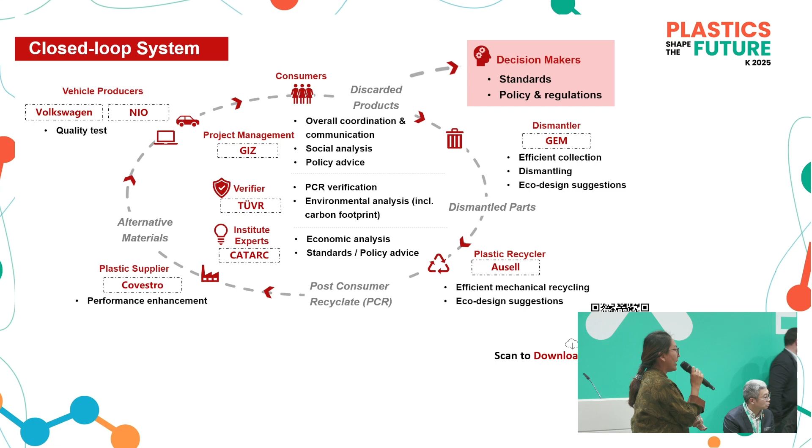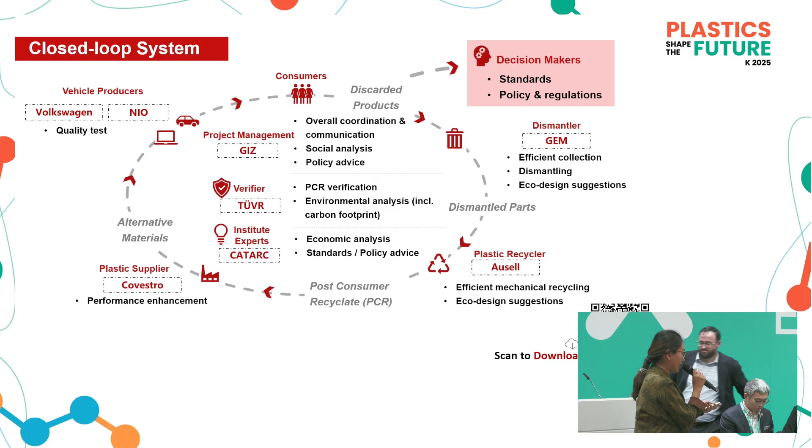In the past, I think, 30 months, we are happy to share some results today. Beyond this, you can also scan the QR code, because we are also doing a baseline study in China about plastic circularity in the automobile sector. And as our partner from Green Eco Manufacturer cannot come today, I will speak on behalf of them.

So this is the journey of the dismantling process from GEM. It normally takes only 10 minutes to do all the pre-treatment, dismantling, everything. In the project they are removing the car light from the car, but without further approaches, because we have to do an internal experiment. This is challenge number one. If they removed the shell from the car light, it would take an extremely long time, and they would have to invest a lot of personnel and generate additional cost.

And challenge number two: after the analysis, we found out that of the material selling part, 90% comes from the metal, and for plastic they can earn only 4%. So they quite lack the motivation to dismantle and refine the plastic further. This generates the challenge that we have to pay additional logistics cost, because we have to send the car light in that format to Ausell. But we are also happy to hear what Ausell is doing, and I will pass to our corner here.

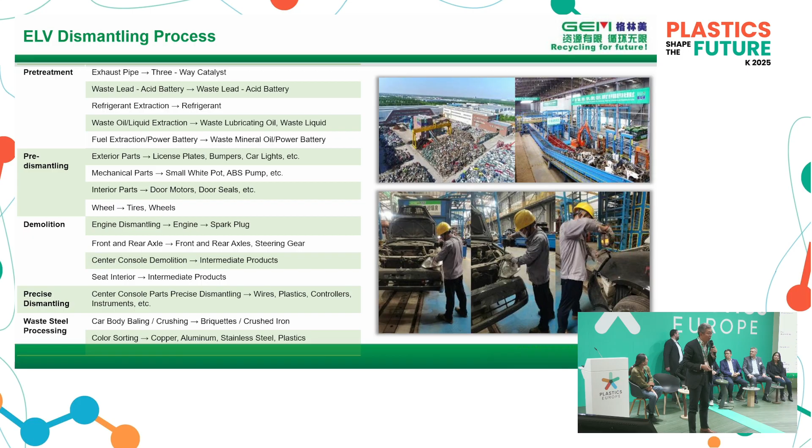Okay, thank you, Jingyue, for the introduction of GIZ and also our upstream process. This is Liang from Ausell. It's my honor to share with you what we did in Ausell for the waste vehicle lightings.

Generally, people always think that waste automotive lighting modules are very easy to handle: you just take them out from the end-of-life vehicles, do some disassembly and just the cleaning. This is usually how people consider we treat the waste vehicle lighting part. But in reality, the process is more complicated. I will share with you that this is a very simplified process, and you can see that it includes at least another 4 steps.

First you need to ensure that your lighting cover has been disassembled from the base part, and also you need to remove all of the electronic parts, all of the glue, and do some preliminary cleaning to remove all of the dust. And finally, there is the deep cleaning to remove the coating on the vehicle lighting covers. So you can see that before the coating removal you need to do a lot of steps.

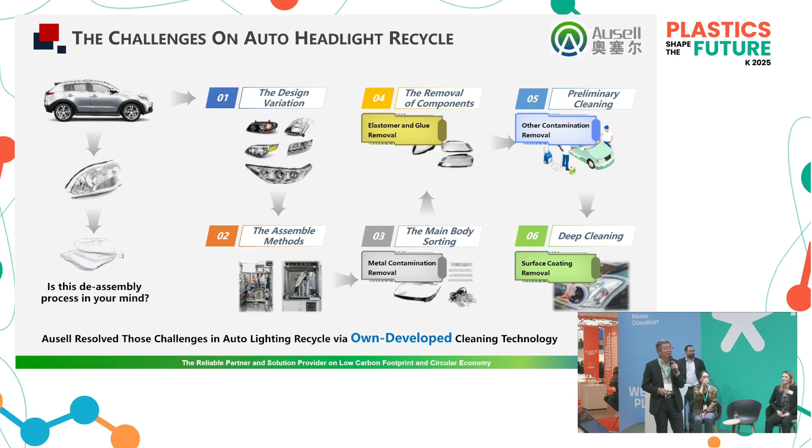So at Ausell we have developed our proprietary cleaning process to ensure that all of these contaminants have been removed during the process. So what is the result we can achieve? Let's see the result. Let's see what magic we apply for the vehicle lightings.

At the bottom left part, this is the photo from the microscopy, and you can see at the left part that there have been a lot of contaminants, a lot of dust inside. But after the cleaning, after we make the pellets, you can see there are no black specks. There are no contaminations. And for automotive, mechanical properties are important, but the surface, the color, is also more important for the recycled product.

So you can see that at the beginning, the flake looks a little bit yellow, a little bit translucent and a little bit dark. And after we apply our cleaning process, you can see that we improve the transmission, reduce the haze and also reduce the yellowness.

So the pellets we produce can give our downstream partners freedom on product design and also the application range. So later on, I will pass my microphone to our downstream partner, Anya, to share with you how Covestro works with our pellets. So Anya, it's your turn.

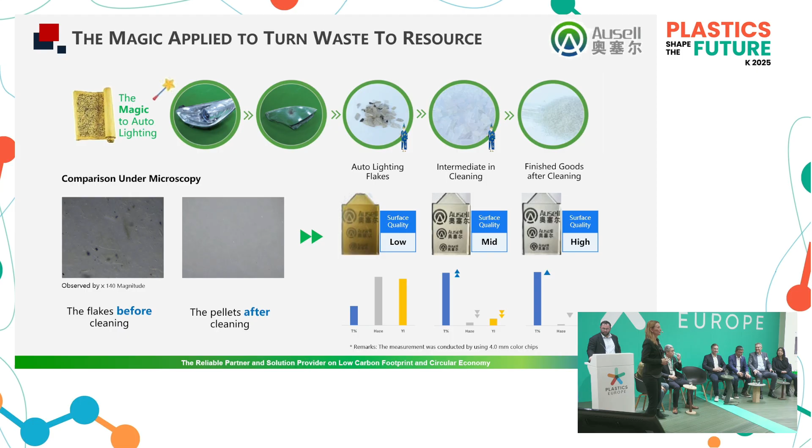Perfect. Thank you, Liang. So, good afternoon, everyone. My name is Anya Rota, and I work as a global mobility manager at Covestro. Covestro is a global plastics manufacturer with a strong focus and commitment on circularity. And today I'm very pleased to point out our role in this joint project on a closed-loop ecosystem for end-of-life headlamp recycling.

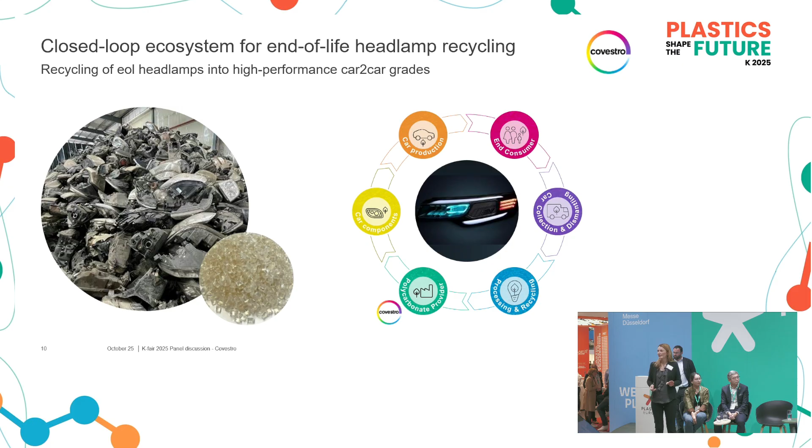On the left-hand side, you see a big pile of waste coming from end-of-life headlamps. And actually, this represents a great opportunity as we have a selectively sorted waste stream available. At Covestro, we make sure that this pile of waste is transformed into high-performance polycarbonate pellets that you can see in the smaller bubble next to it. We call these our car-to-car grades. These car-to-car grades are specifically engineered to fulfill OEM specifications, and will also help the industry to fulfill the upcoming ELV regulation in Europe.

So what makes our car-to-car grades so special? First of all, we have high-performance materials that are comparable to virgin materials. Of course, they also comply with all regulatory requirements on hazardous substances, so we grant OEMs full confidence in both safety and sustainability. The feedstock is derived from end-of-life vehicle headlamps, and it's TÜV certified to grant full transparency and traceability over the value chain. The feedstock supply chain is well established within the APAC region, so we ensure reliable sourcing in China.

Concerning material specifications, our first pilot grades offer a recycled content of up to 50%, and we can also offer various colors. Furthermore, a quality control system is established to ensure lot-to-lot consistency. And finally, the OEM specification process is in progress, which you will also hear about later on. This paves the way for a broader adoption of these materials in future car applications.

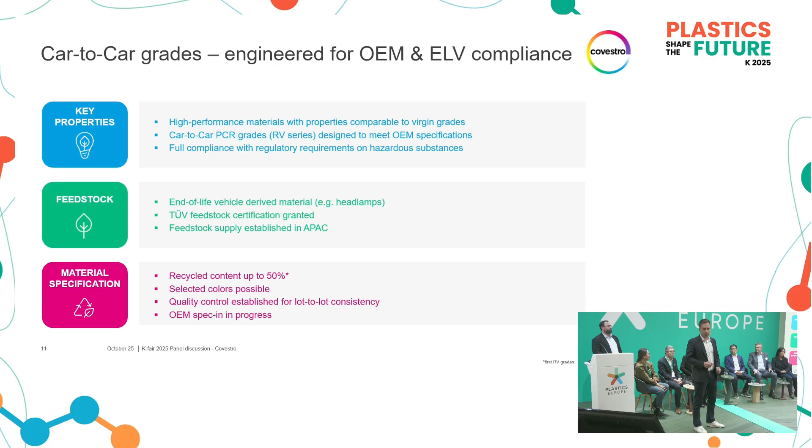Okay. Thank you. So hello everyone, my name is Kraemer. I work for Volkswagen Group in China. Our role in this project was to evaluate and test the material quality from an OEM perspective, and also see if it can be used and applied in our automotive parts. Therefore, we did a two-step approach. We first tested the material itself, the recyclate, and then in a second step produced a part with a supplier and tested the part.

And when defining how we test, it's really important what kind of function this part has. Is it an exterior part, an interior part? Is it painted or not, and so on. This is very crucial to know. For this project, we chose an interior part from the middle armrest between the driver and the co-driver. These are actually two parts which are assembled together. And when we tested, we applied the same quality standards which we also use for virgin material.

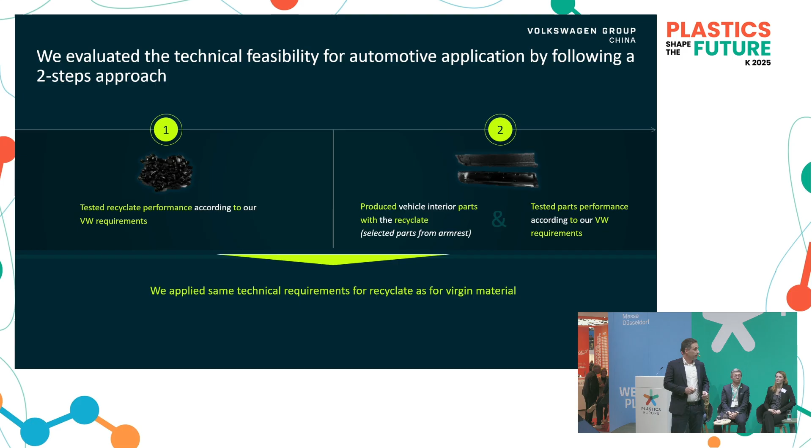Good. So the first step was our material testing. So we received from Covestro not only the recycled material with 50% recycled content, but also virgin material. Why? Because we wanted to test both to compare them. And then we did several basic tests, like for the mechanical properties, for flowability, for emissions. And then on top, we went a bit further and also tested the properties in low temperature, high temperature, in different humidity conditions, after heat aging, and so on. So we did a very thorough testing to compare these materials.

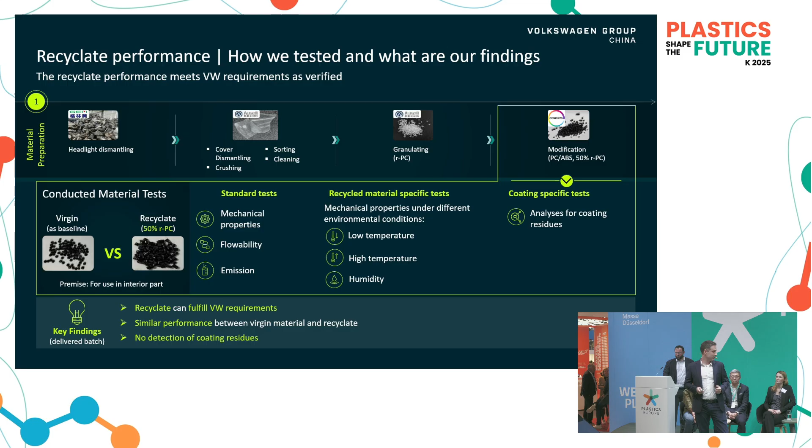And then on the right side, the last thing we also tested is if we can find any coating substances still in this material. For us, this is very important to have a very, very pure material, because it would have an influence on the mechanical properties. But the result was very positive, so it could fulfill our VW requirements. The recycled material also was very similar in performance to the virgin material. And we also did not detect any coating substances in this material, so this went very well.

And then we produced the part and we tested the parts from this armrest, which I mentioned before. We went to the supplier, also checked the injection molding process there. We did tests in different environmental conditions, different temperatures, heat storage tests, and so on. Because it's an interior part, we also tested for odor, so for the smell, and also for flame resistance and light resistance. So we did a bunch of tests, and also these tests were successful. Also quality comparable to virgin material produced parts. And one thing also worth mentioning is that our supplier did not have to modify his tooling when using the recycled material. This was also quite important.

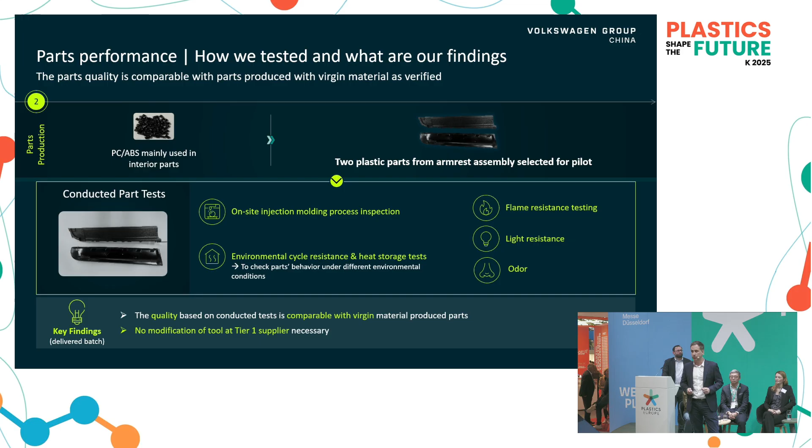To sum this up, from our point of view, this was a very successful feasibility study. The material quality was very good. We didn't detect any coating residues, where we had concerns, to be honest, at the beginning. We successfully tested it in the interior parts, and we see a potential that this could also be used in other parts. But nevertheless, there are some topics which, from our point of view, still need further studies. We received material from one batch. To be able to say if we could use this in a huge volume, we would also need to ensure that this works in all batches, and the material quality is always the same.

And what I forgot to mention before, we also do functional tests for our parts. In this project, we could not do this for the armrest, so this still would need to be done. And if we would want to apply this material also to other parts, then, as I mentioned at the beginning, each part, depending on function, where it's located, and so on, needs specific test procedures. So then we would need to do additional or other kinds of tests, probably. But overall, a very successful project, at least from our side. Then I would hand over to NIO.

Thank you, Simon. Right, I'm from NIO. Volkswagen is probably well known, but how many of you have heard about NIO? Very good, thank you. I'm encouraged to continue to tell the story. Did I do it wrong? Yes. You need to click. Yeah.

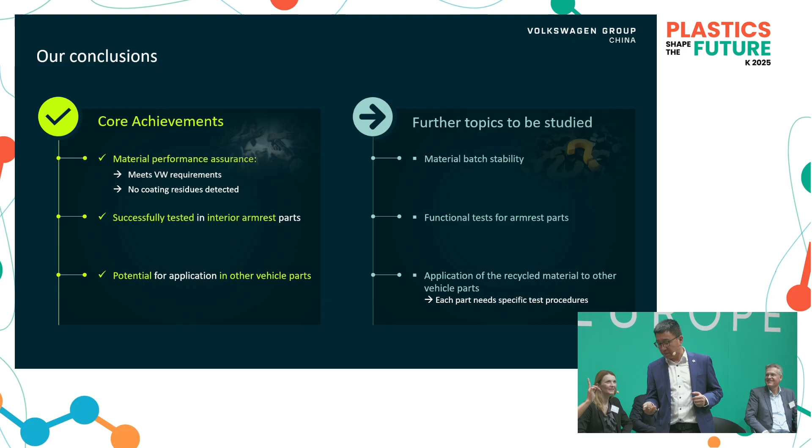Okay, so we should go to the blue sky. That is exactly what NIO stands for. Right, you can see that. That's exactly why we participate in this program, because NIO is created with a belief called blue sky coming. And that is exactly why we wanted to establish a company called NIO. We want to use smart EV technology to really change the climate and give the blue sky, first in China. And of course, we also have our values.

But in this program we worked on together, we believe innovation is working hand in hand with circular economy. And that is also the reason NIO has been practicing innovation together with the circular economy. And you can see on the left hand, basically, we defined from the supply chain side to the manufacturing side to the user side. So in each part of this value chain, we try our best to practice and make the best practice. And as you know, part of our car body is made of aluminum.

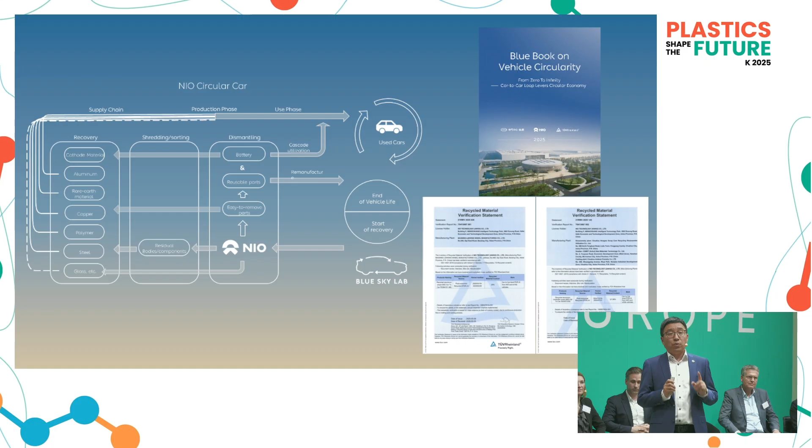And finally, one month ago, we could really publish the first blue book together with TÜV Rheinland, I think the colleagues will present later on as well, and with Chinese CATARC together. And exactly on this project, we started to use exterior parts. As you can see in this photo, that is the cover of the camera parts of the sub-brand of NIO called Firefly.

And this car is the first NIO small smart EV. The target customers are Generation Z and the millennial generation, who really put a lot of effort and value on the circular economy. And this part has proved to be very successful.

And we believe that's only the start for a young company like NIO, 11 years old. But it gives us good confidence that we will be the pioneer as a circular car maker also in the long term. Thank you.

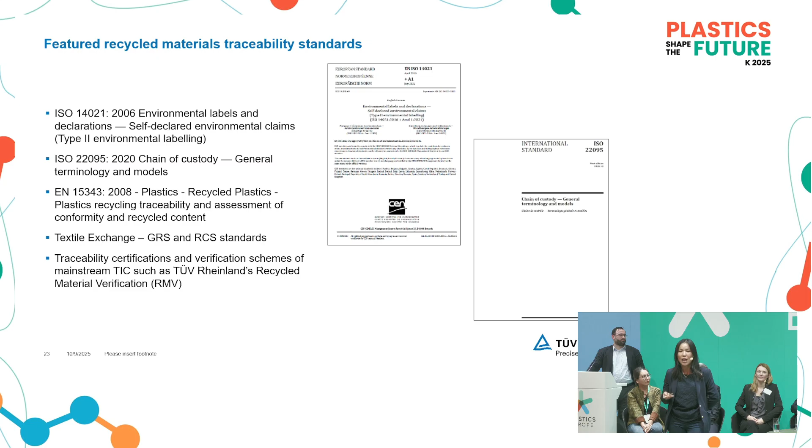During our verification project, of course, we rely on internationally recognized standards, such as ISO 14021 for recycled material declaration, chain of custody standards such as ISO 22095, and in particular plastic-related standards such as EN 15343, a lot of numbers. All the standards are very important, but it's really about the methodology we apply during this verification process. That's what made this project really credible and robust.

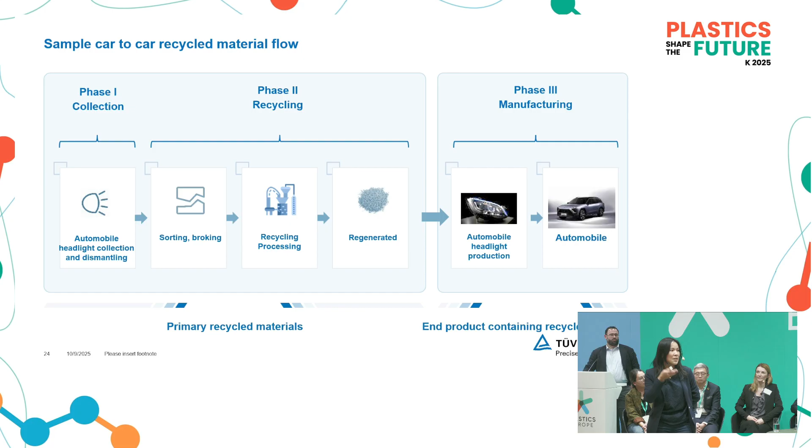So as you can see, all the other speakers have explained the whole recycling process from the headlamp till the end parts. We have traveled with them at each stage of the value chain of recycling, reuse and reapplication of these plastic materials. What we focus on is really a qualitative and a quantitative approach during the verification process.

Within the single suppliers, we focus on the qualitative side, such as the management system, whether they have robust SOPs in place, what type of traceability models each collector or processor is using, and whether they have an internal verifiable mass balance system in place for us to trace the data.

And between two suppliers, from upstream to downstream, between the two companies, we really focus on the transaction records, transportation records, and production records, and that all the data from A to B match, so that the percentage of verified content is traceable and verifiable.

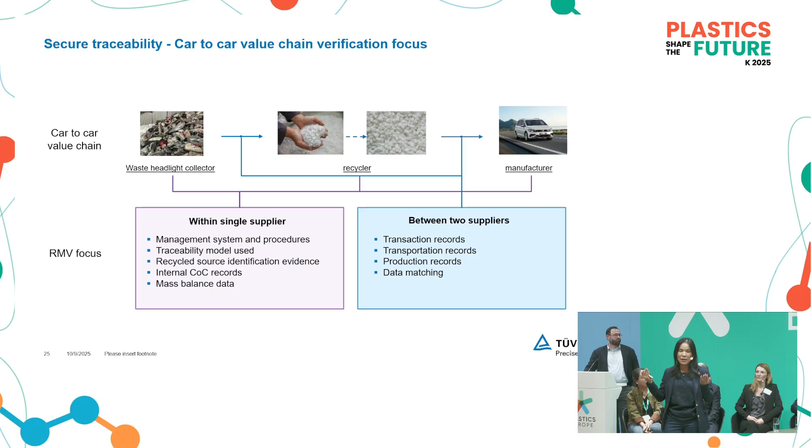Finally, you can see many other speakers have already showcased their verification statements. We are very proud. We had the opportunity to issue the very first recycled material verification statement in China. It's really a showcase project for us.

Why do we have to talk about verification in this project? Because it is really through the check of qualified technical experts from an independent third party that we can provide a single source of truth, building trust and credibility, and ensuring that what you claim is compliant with internationally recognized standards. And of course, in today's so-called VUCA world, with a lot of geopolitics and supply chain disruption, these verified projects really provide your supply chain and suppliers with resilience and transparency.

Finally, as my personal wish, we are very happy to see the fruitful result of this project. As one of the speakers mentioned, we now really would like to see how we can grow it at scale and make this circular project applicable to the wider industry to accelerate circularity in the automotive sector.

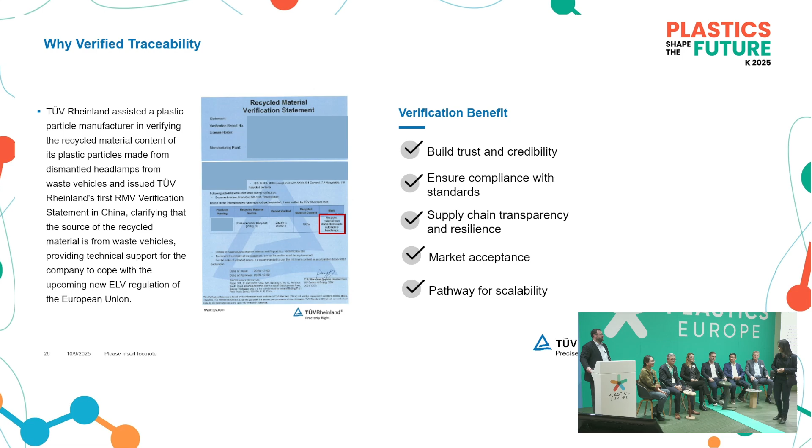And thanks again to GIZ for initiating such an innovative project.

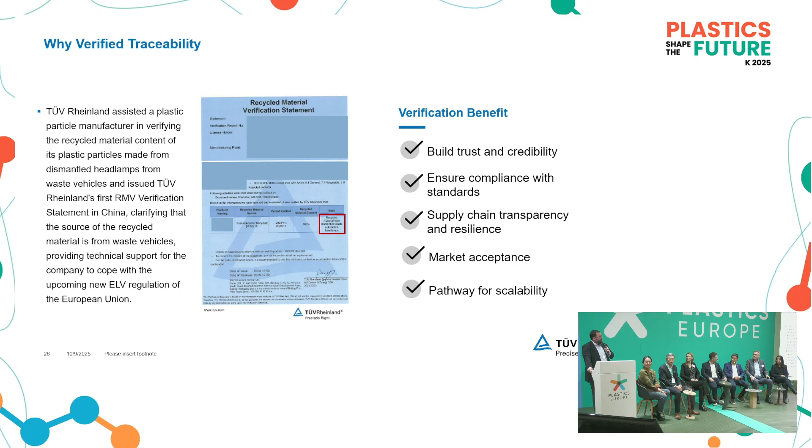Thank you all. And before we open fully to the floor, we have a question and some comments from Jochen Hardt, particularly around, I think, the question of scalability, which was brought up at the last one, and what particularly surprised you, and what main learnings, because as I think from our last panel, and now into this one, what we see very much is we are approaching a very crunch time. In these pilot projects, these examples very much will be hopefully the norm in 6 years or less. So what would be your immediate takeaways?